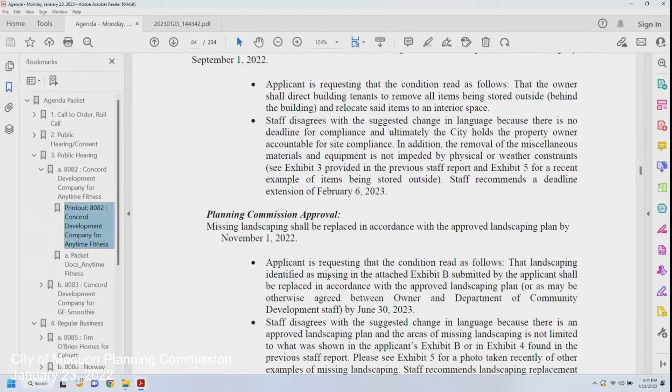I think this is page 93. Thank you, correct. We'll be here all day if I keep going on this. Yeah. Did I just lose it?

There is another fence for trash screening that looks like it just needs a fresh coat of paint. Would you care to comment on the condition of the other fence in question?

Commissioner Stoker: I would ask staff, what's your opinion about going out and inspecting it once the work has been completed? Is that something you would normally do, or is that appropriate?

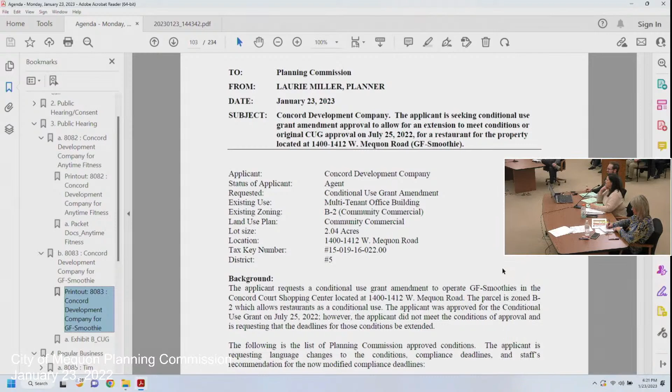I'll make a motion to approve with the same conditions on the fence that we had in the last approval. And I will second again. Motion and a second, any further comments or questions? Hearing and seeing none, all those in favor please say aye. Aye. That item's approved as well. Any opposed? I don't think so.

All right, on to regular business. First up, the first item has been canceled and pulled off the agenda, which brings us to Tim O'Brien Homes.

The applicant is seeking a wetland setback waiver and specimen tree removal to allow for the removal of specimen trees for the property located at 12333 North Lake Shore Drive.

It's a matter of process, did we table this last time or no? We did, yep, in November.

Usually there's a note on there, but I guess first we'll need a motion to remove it from the table. So moved. Second. Motion and a second. All those in favor of removing it from the table please say aye. Aye. Now we can talk about it.

Why don't we start off with a quick staff update, or is there anyone from the public who wishes to speak? We'll start with that before we jump into a staff report. We did get at least one email on this, which I think people have read.

I'll be a bit brief on this one. The staff report is pretty similar to when they were here in November 22nd for the original application. So this is a request for 2 specimen tree removals at 12333 North Lakeshore Drive.

As Mayor mentioned, it was tabled in November 22nd, and it's just for a residential home build. So the key changes from the previous application, 2 main parts. If you guys recall, there's 2 wetland strips on this property. One's a little bit west of where they're proposing the house, and one's a bit east.

There's 2 different wetland setbacks on each of those. The west one is a 50-foot setback or protective area. The east one is a 10-foot setback. In the previous application, the applicant had the house proposed about 14 feet off that west wetland, which was ultimately not approved as a waiver of that reduction. So they've now moved it to 30 feet off that west wetland, still requesting the waiver for the reduction there. And then they meet that east wetland setback.

Staff also recommended lowering the elevation of the house by about 3 feet at that November meeting from that application. The revised plan that they have tonight has the house 1 foot higher than the previous application.

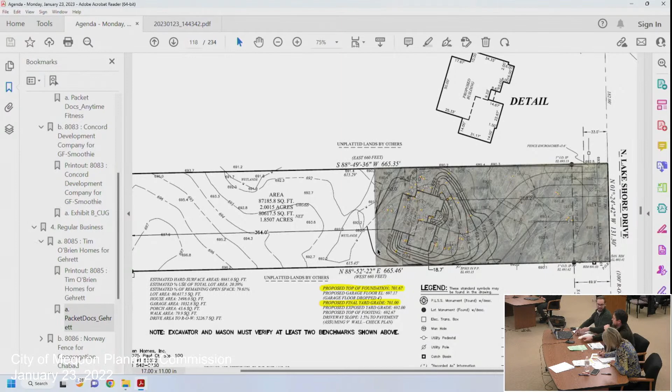Got a notification when I watched it. We have no sound online. I don't know if the audio-visual technician can hear that. Apparently, we have no sound online when people are watching at home. I'm not sure what to do about that here, but we'll keep rolling and we'll try and figure it out as we go.

Any questions from the commission on the revised plans before us? I know we talked about this at great length a couple months ago. Commissioner Bach, just discussion?

Yeah, so I remember we spent a considerable amount of time talking about this area, and I'm still a little bit confused and just want to make sure I understand everything. I had a chance to drive out there and walk around and look at that property this afternoon. It's a challenging site. The home that I was at this afternoon, it's clear that, like many properties around here, there's a whole bunch of ash trees that are gone.

On this particular property we're talking about, there's going to be a considerable amount of landscaping needed. There's a lot of buckthorn, a lot of dead ash that are going to have to be removed, plus the specimen trees that we're talking about. So that's going to be a whole new area. It's going to look completely different.

They did have a diagram of what that would look like. They didn't provide a grading plan because, with the elevation they currently are showing, this would be very difficult for them to not impact these wetlands since it's only 10 feet from the edge of the house. So just grading down from the elevation would be a challenge, or they would need retaining walls or something of that nature.

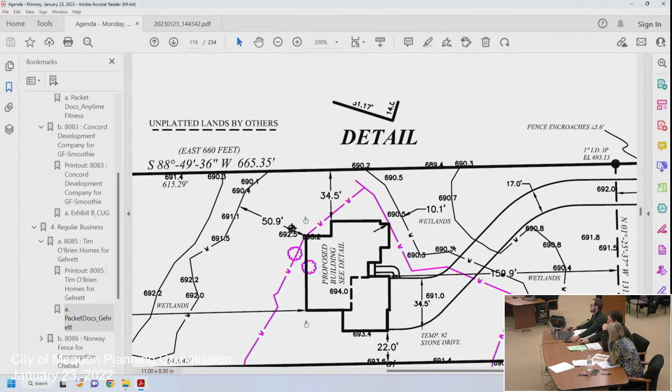Is there a middle ground, not 50, but 40? There's got to be some movement here. The 30-foot setback shown on this other figure is what they were proposing, and they got the grading to work out that way. Most of the reasoning for the 50-foot setback recommendation would be to save those trees that Mike was referencing.

Can I respond? Yeah, just on the setback on east wetlands, the concern I've got from the home builder is that we'd be very worried about disrupting the eastern wetlands in digging the basement if we were to be that close, just like the construction process.

I think if I recall, the more pristine of the 2 wetlands is actually the one to the west. Yes, the wetlands in front are of lower quality, hence the smaller setback. I think the bigger issue in front is making sure the water flow path from south to north is unimpeded and unaltered. So we'd rather encroach further on the ones in front than the ones in back, so long as the water flow isn't impacted. The ones in back are more beneficial from the plant species and the amount of water pickup into the ground there—there's more wetness on the east part of the property than the west.

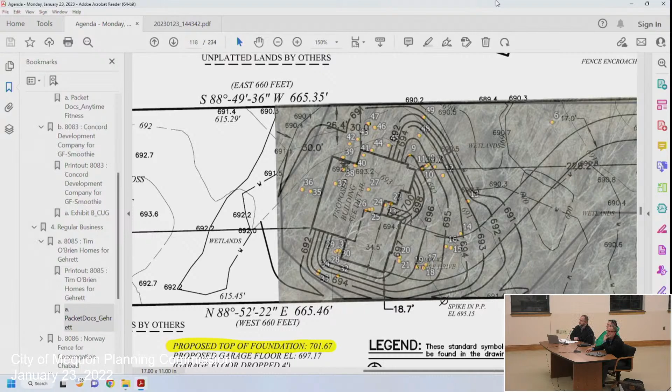The other thing I'll point out is that the proposed building location, even though it's slightly elevated, is elevated versus the surrounding area.

But just a point of clarification, the wetness in the front doesn't mean it's a better wetland. Correct, it's just more wet because the water flows there. I think the ones to the west are actually letting more water get into the ground, which is what we want wetlands to do. But that's also why we don't want to move closer east, because the further we go east, the more wetness there is.

Well, there's more water on the surface. Not wet, there's more surface water there that flows freely. Yep.

I don't know how accurate there's a graph or chart, provided by someone who lives nearby, of the water flow patterns. Do we at all know if that's accurate? Because it seems like there's quite a bit of room to where the water's flowing, so moving this farther to the east would actually be a net benefit. You'd have more setback for the wetlands in the west, and we just don't want to disturb the water flow on the east.

But the wetlands in the front are low grade, the DNR would probably let us fill those, but you just can't impede the stream. You're talking about page 122, and my understanding from walking the property several times, I don't disagree with the general flow of what they've proposed there. To me, that seems accurate. But again, it's east of the proposed home location.

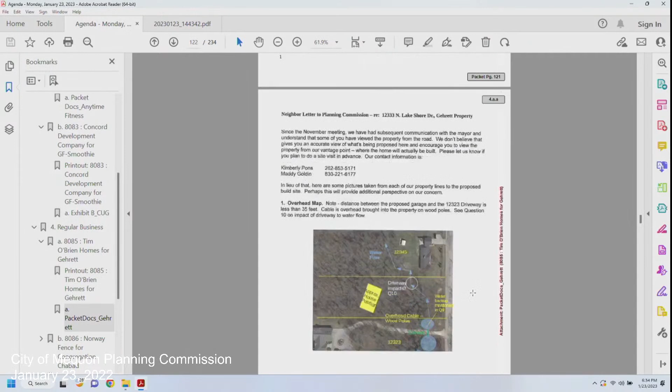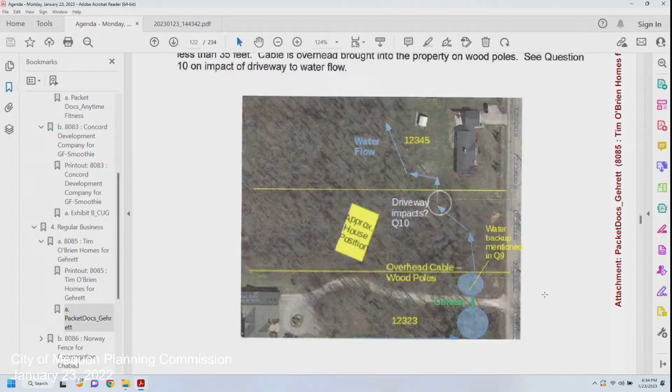I think what we're talking about is trying to push the home farther to the east to stay away from the wetlands in the rear. In November the discussion was, are there ways to get the DNR to omit a wetland, correct? We're not even talking about filling it, we're just talking about getting closer to it.

So in staff's opinion, would we rather get right up to the one in front or have more buffer in the back to the west? If they're meeting that 10-foot setback from that east wetland in both the 30 and 50-foot conditions from the west one, either way is not going to impact that east wetland.

Would we be willing to make a change to the home, the way it sits on the lot, to achieve that? Or a lot of it has to do with the elevation as well. Right, component of elevation. I think that was the concern, the slope off the front of the house would be very steep if they were 10 feet from that east wetland.

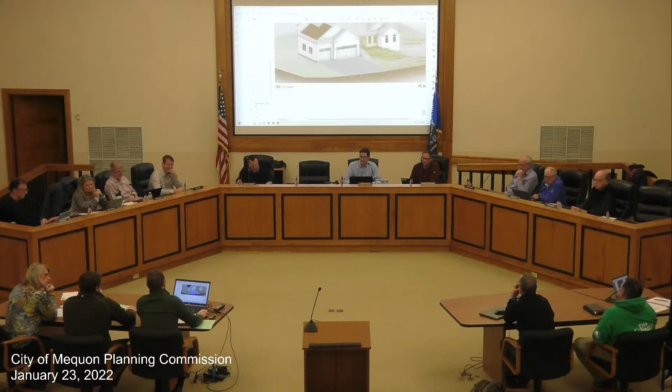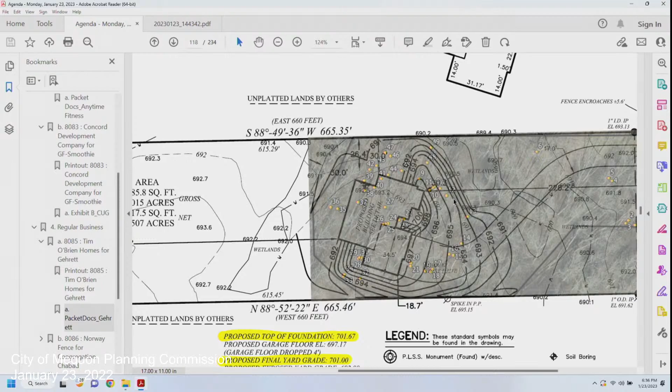But since the one in front is not as nice, would you go to a zero setback, as long as the water flow path wasn't impeded? I don't think they could. Correct me if I'm wrong, but I don't think a 0-foot setback would be constructable without disturbance. So a 0-foot setback on the east wetlands, for what purpose? I'm just asking what's possible. Even reducing it less than 10 would probably be pretty tight for construction, I think.

Commissioner Stoker: I was very vocal about this in the last meeting, and while I actually appreciate this grading plan because I see it working, obviously we have a tree issue with this. I can sit here and say with pretty much confidence, I don't see this commission accepting the amount of trees that are going to be affected by this placement. I thought about this and read every word of this a couple times to get a grasp on it. I do understand this, but it's complicated.

I think this is a time where we really have to look at staff's recommendations and follow them. There's a lot of things here. I was a proponent of changing the way you were designing the house to help make concessions for some of these things. Even if the trees weren't an issue here, I would approve this based on the grading plan, but I would empathize with the neighbors because in my own opinion, it's not going to feel right. That said, I would still approve it because that's really all you can do on this lot. You are definitely hamstrung here, you don't have a lot of opportunity, and I empathize with that.

And I'm actually going to be finding myself in a situation very similar to this in the very near future. So I think because of the complexity of the issue, and maybe not everyone on this commission is understanding it, I think we as a commission really need to rely heavily on staff's recommendations, because even me as a builder, I'm relying on the city engineers that they are comfortable with the way this lot is going to grade. They have much more expertise on wetlands than I do.

So we have to go into the ground, or we have to move the house farther to the east. In order to accomplish that, what do we want more, the wetland setback to the east or the trees to the west? I think it's fair to note that staff's recommendation all along was that the elevation was high. So if you push to the east, the reason for the drop in elevation was to make it more feasible to get closer to that wetland in the front, which I get is counterintuitive, but it would preserve the trees and drop it down so that you could feasibly grade between that wetland and the front. So that's been staff's recommendation all along, and that's what we're kind of being ignored on.

It feels like we'll never get 100% of what we want. But I think the reality is I want to find a way to make it work for you.

I really do, and that's why I almost want to take it off the shoulders of the commission and say we have to follow staff's recommendations on this. Then if there's a redesign or a change, if there's still concerns, come back, and if we have to approve 3 specimen tree removal or something, fine. But this is not an easy issue, and if a decision we make tonight could say that this lot is not buildable, I'm very uncomfortable doing that.

That's why I want to keep deferring to staff's recommendations. I don't have the answer, guys. I don't. You asked the question, what kind of house could be built?

I turn that to the builder. No, we'd have to push the footings down to get 10 feet from that east wetland, yeah.

I guess back to Commissioner Schaefer's statement, just because you can do something doesn't mean you should. Lowering the footings is really the move that gets made if that home's going to slide to within 10 feet of the east wetlands, because you're just not going to be able to slope the ground from that first floor elevation down to the east wetlands.

And what's the impact of doing that to the overall project? Well, it goes against the engineer's recommendation of building the footings above the water table. Again, to Commissioner Stoker's point, gravity's an awesome thing in that regard, and you're sort of fighting it, using artificial technology to try to keep your lower level dry, which yields angry phone calls to all kinds of people.

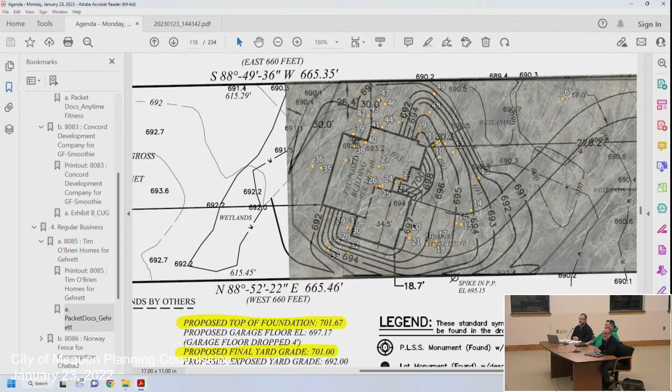Yes. And as a builder, I'm not telling you that's what I think we should do, but this may be a situation where you can't have a full basement with living space. You may need to be in a crawl space, or this might need to be slab on grade. I'm coming to, I guess, without cutting to the chase, you may be trying to design a house that will not work on this lot. And I think that's where we're at.

So I reached out to a realtor from Shorewest to research homes built on slabs. In the last 10 years, there were 2 homes sold in Mequon on slabs. One was built in the 50s, one was built in the 70s. Neither of them are anywhere close to the type of home we've designed here. So building this home on a slab really presents all kinds of additional issues.

So I'm kind of left with, I can't come up with something that the staff is okay with, that the commission's okay with, that the home builder and the engineer would advise, and I'm left with a piece of land that I own that I may have to sell to someone else who will be here in 6 to 12 months requesting the exact same thing that I am. Because what could they build that would be approvable by everyone here tonight? I don't have any easy answers to that.

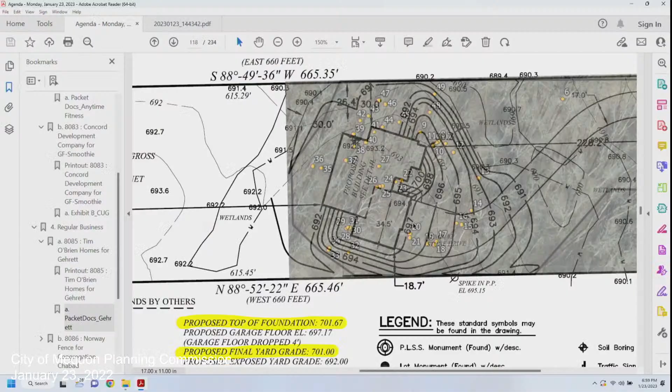Commissioner Barnes: And again, not disagreeing with what's being brought up here. Just a fresh idea, and we don't have to get into the detail of it, but would there be a feasibility of a common driveway that would allow, call it a relocation of the house, the proposed house framework and the driveway and its relative position to the wetlands with the gradient change?

I just sent off, and I'm not sure that the driveway is the particular concern. We have approval from the DNR to cross the wetlands already with the driveway. I understand, but in terms of placement is really what I'm looking at. I think it's the framework of the house.

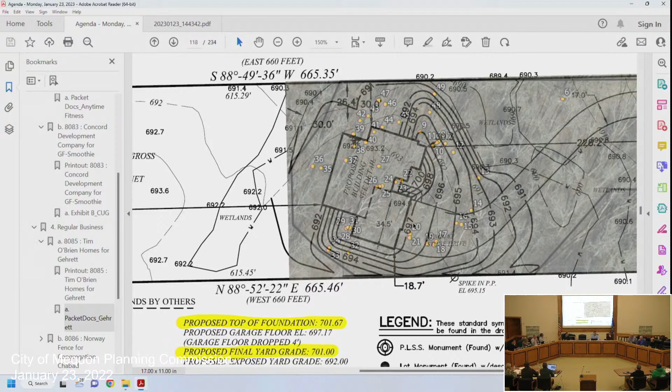It's pretty clear, trying to get the exact page here. It's pretty clear on page 119 of the packet. There's a certain setback from the front and rear wetlands and the grade, and that's where you have to put the house, somewhere in that area, or very close thereabouts. The driveway is not really the issue. You just have to cross a wetland, which you can do with a culvert and still maintain the water flow.

But it wouldn't affect the position of the house in terms of an access coming from the south. Not that many other places to go. So, okay, enough said.

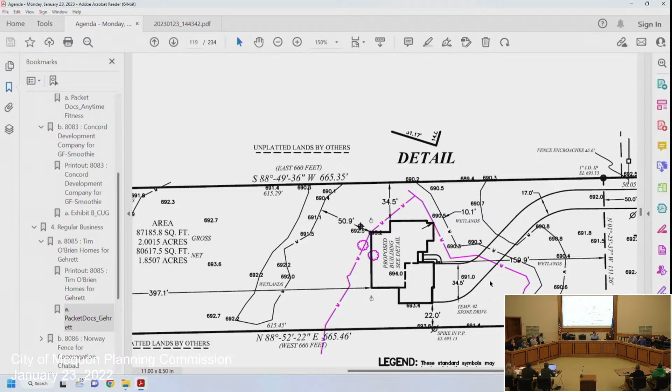One last thing. So we're basically to a point where we're saying we're willing to say this land isn't buildable because of these 11 trees that don't meet the 30-foot setback we've proposed, where 31 trees would have to be removed. If we move it within the setback to 10 feet off the east wetlands, that saves 11 trees, but it would push the house down into the water table. So we're saying based on those 11 trees, this property isn't buildable.

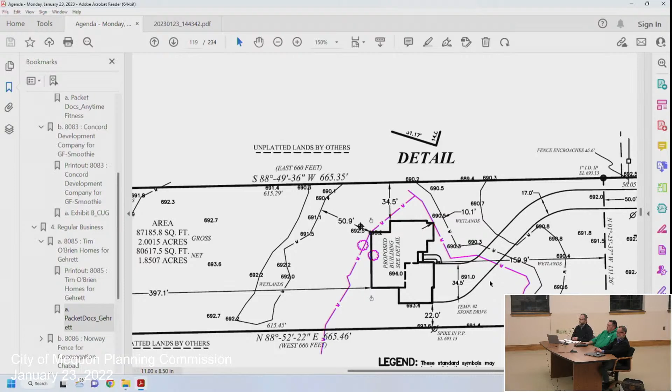And the home, because that's the decision, and the overall home height. We've got to take one issue at a time, just as the mayor proposed. I don't think we can. I think it's a lot, and I think it's aggregate. I think it's everything as a whole for me.

It's not like, okay, let's talk about the trees and debate this, let's talk about the home height. The trees are a consideration for me, but the home height is a no-go for me.

I think we've had some pretty hefty discussion. We've tried to legislate to our best ability on the fly as a commission here. I haven't heard one positive thing from the commissioners. I think you've heard the concern. I think Commissioner Stoker eloquently and pretty directly put it that maybe you can't build this house on there.

You probably would have to look at some different basement configuration. You've got high groundwater on there, you're in between two wetlands. This lot has concerns. We're not saying it's unbuildable, but as the plan is before us today, I don't know that it's approvable.

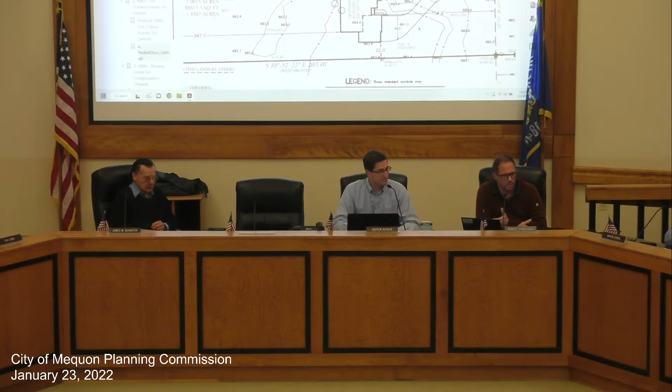Based on that, I would like to make a motion to deny. I'm looking for a second and then to call the vote. I would second that. I have a motion and a second. Are there any further comments or questions?

Seeing none, I have trouble with this. I'll just say this: I have trouble with this one because it's a challenging site. We're trying to protect the wetlands. I understand not wanting to put the basement well into the ground and the challenges that would present. And I understand the argument for the grove of trees, but the tree preservation ordinance has standards for species and

caliper that clearly give us the right to approve or deny something. It's a little squishier when you get into trees that don't meet the size. I know the ordinance is a little squishy, but it's placing another undue challenge on this property.

If we're going to keep this zoned R1B, we should be open to something being built there. Maybe this isn't exactly it yet, but it's a challenging lot. It's been empty for a long time because it's a challenge. I understand everyone's reservations. I think we should find reasons to say yes where we can, and maybe this isn't the proposal, but...

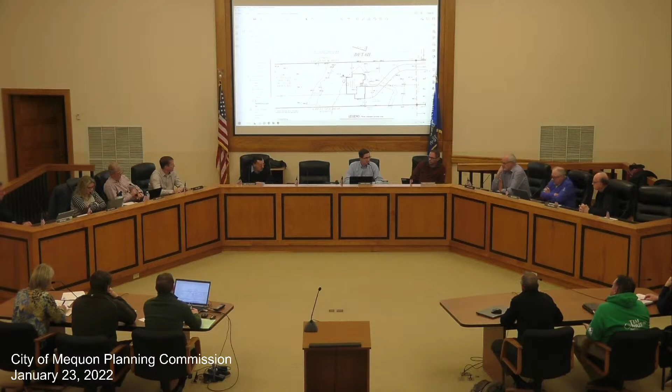Commissioner Becky Schaefer: Aye. Commissioner Stoker: Nay. Commissioner Lemke: Aye. Commissioner Jim Schaefer: Aye. Commissioner Gentes: No. Commissioner Chorin: Aye. Alderman Strelchuk: Aye. Mayor Nurbin: No. The vote does pass, 5-3.

Oh, we're past that item. Sorry. I think we should be open to something working here. This just wasn't quite it.

Next item, Norway fence for Congregation Chabad. Applicant is seeking a site plan amendment approval to allow for the fence along Mequon Road for the property located at 2233 West Mequon Road. You've got this one, Jack? Yeah. All right, thank you.

Okay, so this is a request from the Center for Jewish Life to put a fencing along the front of the property. This request is coming out of a security study that was done at the property. They're looking to put up a 6-foot metal fence along Mequon Road, approximately 300 feet in length.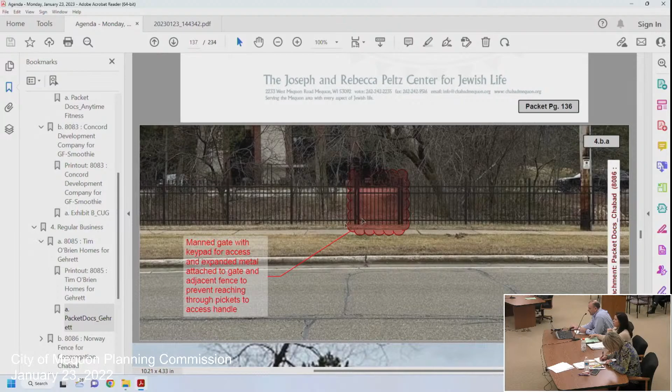I have some pictures here. There was a rendering that was done, and I'll show you that to give you a sense. Now, it's not 100% to scale. You can see from the drawing that the fence will not be that close to the road, and it will not be in front of our stop sign and our street sign, but they just wanted to put together a rendering to give you an idea what it was going to look like.

Originally, this request was going to cover the entire frontage, including the road, but this road actually serves a number of residences in the back, so we told them we could not cut off access to those properties. Instead, what they were suggesting and doing is building these columns and adding security cameras and lighting on these two columns. The fence would continue to the east, with one section where they would have a gate. There's a little walking path used by the residences who walk to the site, so there's a gate they would put in this location with a bit of a code to get in. Other than that, staff is supportive of the fence.

There's a couple recommendations we made. One is that they add landscaping to the front. The fence will be about 7 feet off the property line, so there's adequate space to put intermittent landscaping.

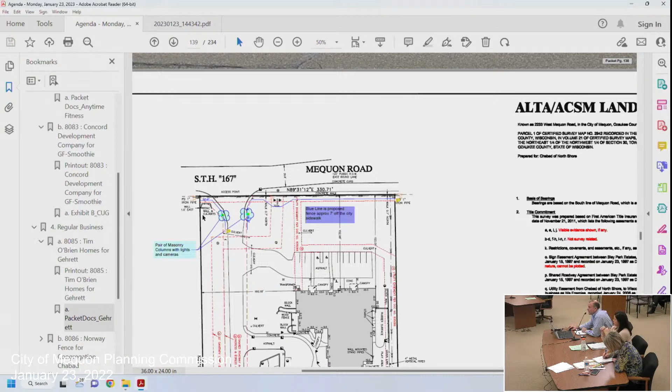You can kind of see it, I'll zoom in a little bit for you. There's a monument sign located right here, and the fence currently jogs around that. We're just asking that the fence come straight this way, so there isn't that jog. I think that'll help with the vision corner, as well as keeping their sign unobstructed from people driving down Mequon Road.

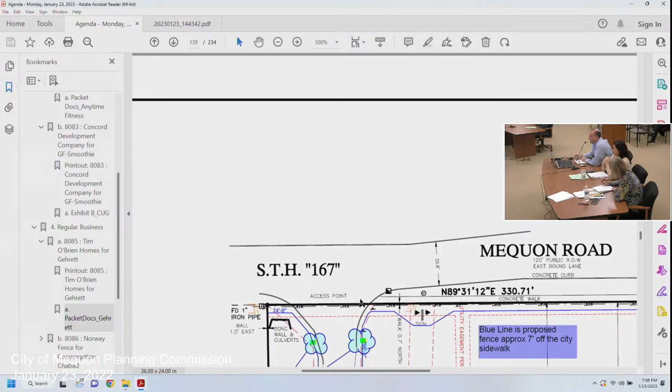In addition, there's a couple of easements on the property. One is our utility easement, which Cole addressed in the report, and there's a We Energies easement as well that runs along the length of the property, for the electrical poles. So we just need to get some kind of clarification or approval from We Energies that they're allowed to put that fence within that easement area.

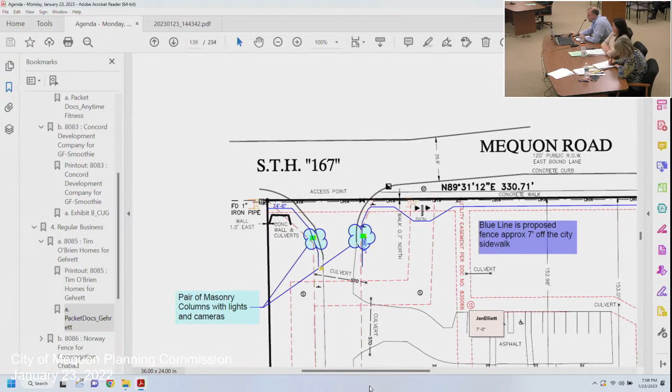And we are asking for the sewer easement to be modified to allow for that fence, with a condition that if they ever need to get in there to work on the sewer, we don't have to repair the fence—that'll be on the owner's dime. So with that, we do recommend approval of the fence according to the conditions in the report.

Thank you. Any questions from the commission? I think it looks nice. So thank you. Commissioner Barnes?

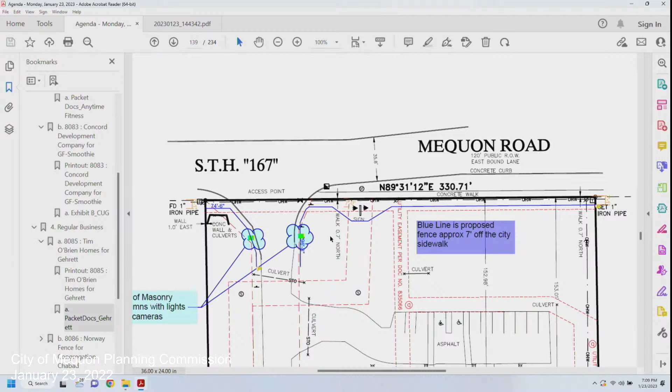Yeah, just a question is, the part of the proposed fence shown on what would be, I guess, the west side of the driveway—this small section here. Would that be running from the decorative entry monument out to the corner of the parcel? It'll go to the corner of the property line and then kind of come back into the pillar, so it'll dead end into the property line.

Yeah. Again, so my only concern that I bring up is the vision triangle, just like what you mentioned for the other direction. It's really more crucial in that direction for seeing oncoming traffic, and it's not that you're going to block the entire view, but it's constraining it a little bit. So I'm just wondering about the configuration on that side of the driveway.

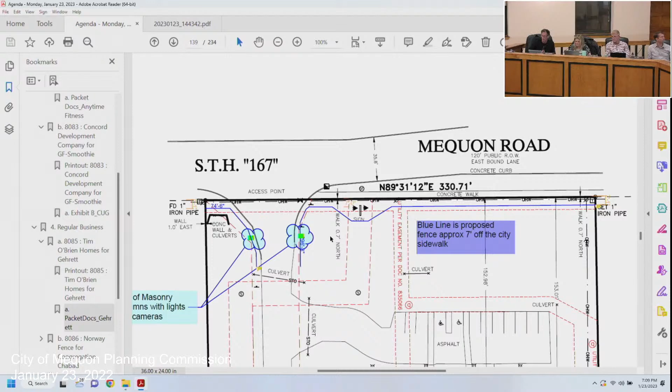Yeah, we'll take a look at that. I mean, it is going to be 7 feet off, so the picture is a little bit misleading. So it's a little further back, and the fence is not opaque—it's got openings in it. I was trying to look at that out of sight, just with respect to the stop bar and the sidewalk, etc. But it was just with what is a high volume street, and the use—it's just a risk.

Yeah, when they submit for the actual building permit for the fence, we'll vet that out thoroughly at that point to make sure there are no issues there. That's a good comment, though, because it will be farther out than the fence on the east side with that one staff recommendation.

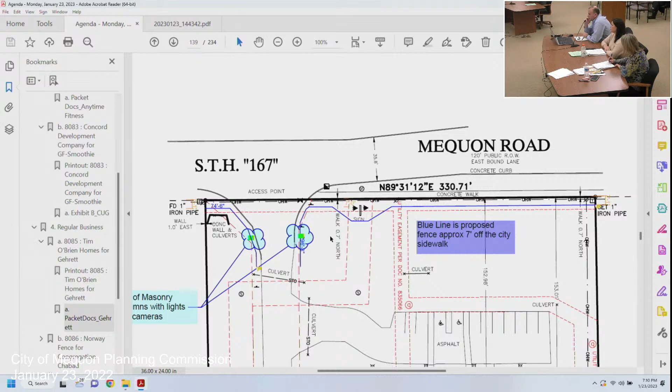But if that's going to be handled in the building permit process. Yeah, we can handle that. I think the only thing we want to watch on the other side is how much vegetation - there's a gully in there, so there's some challenge, some grade issues. It's sacrificing driver visibility of oncoming traffic, so we're going to try to balance between the two. I think we can handle it. Thank you. Any other comments or questions from the commission?

Commissioner Schaefer: I have two things. The pictures that are submitted - is that existing fence already on this site? Page 137, the one with the manned gate? Oh no, that's just a rendering. It looks pretty realistic, really good art.

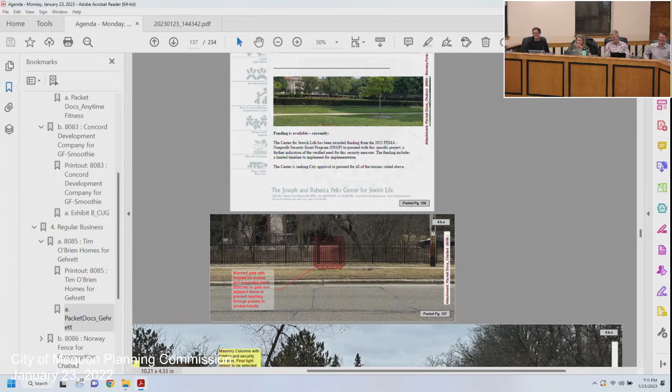And then just a comment - I'm sorry that you feel you have to do this, for the reasons that you feel you have to do this.

Commissioner Stoker: I would just ask, does the applicant agree with the recommendations of staff? Seeing that, I would motion for approval per staff's recommendations. Second. Motion and seconds. All those in favor, please say aye. Aye. Any opposed? Congratulations, thank you very much, looks good.

Next up, Parish Survey and Engineering LLC for Ozaukee Country Club. The applicant is seeking a building plan and site plan amendment and specimen tree removal request approval to allow for a proposed 11,400 square foot building with parking lot, driveway, and rain garden for the property located at 10823 to 11185 North River Road.

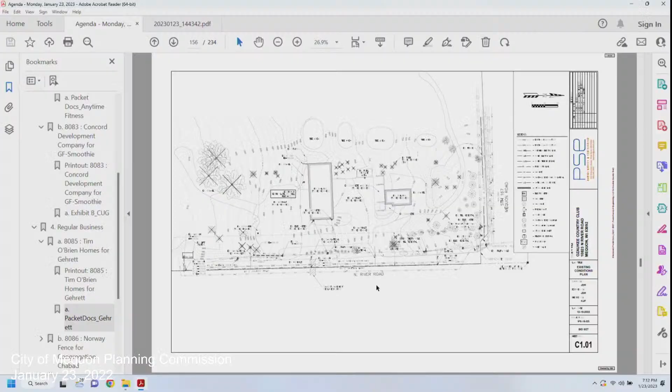Is this you again, Jack? No, Lori's got this one. Yes. You may recall that when they were here last time, part of the approval was to make sure that no trees were going to be removed as part of the site plan. Unfortunately, that couldn't be achieved, so that's what brought us back here today.

No trees in the location of the northern end of the parking lot, between the parking lot and River Road. Correct. So just to take this step by step - we ended up having to do a tree survey, which triggered the tree specimen removal request you're seeing. The Forestry Division recommends approval of the request to remove the 2 specimen trees noted in the report due to limited options for adjustment of the building without impacting additional trees.

So that's pretty straightforward. The new proposal includes minor changes to the building - basically meeting the requests we had last time, which is adding 2 windows onto the east elevation and changing the roof color to match the other existing roofs on the property. Several changes were made to the site plan to reduce impacted trees on the property and the amount of grading required to accommodate the parking lot and structure. The location of the proposed building hasn't changed at all.

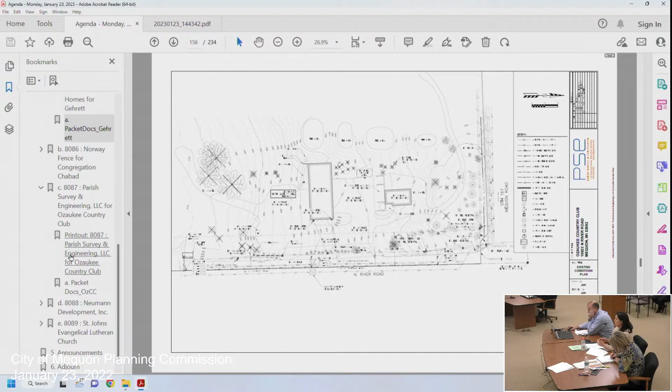The building does not comply with setback requirements from River Road, and that was an issue last time. There's a 50-foot ultimate right-of-way from River Road and a 60-foot setback from the ultimate right-of-way. The building is situated at 83 feet instead of the 110 feet required. Staff, however, supports this because the existing structures right now are much, much closer to the road, so this is still making it less non-conforming than before.

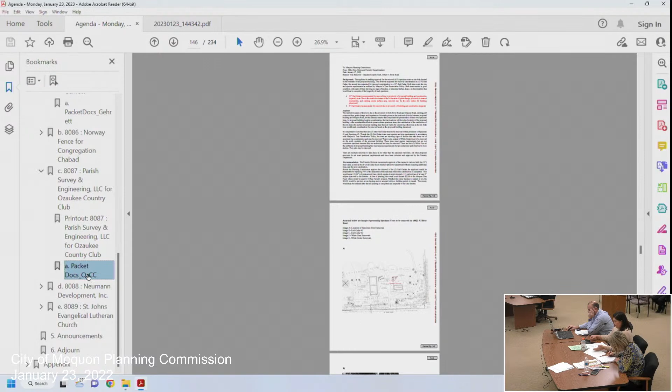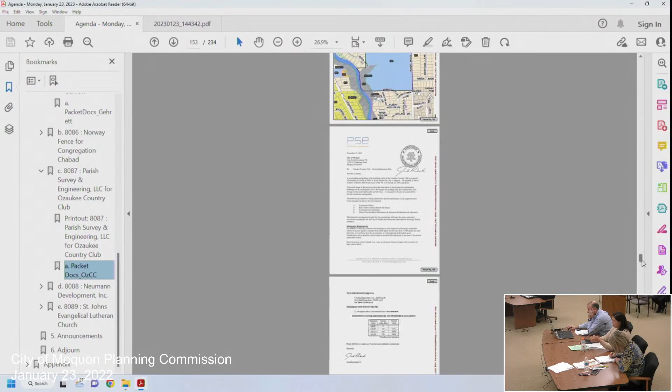Moving on to the parking lot. Mayor, do you have a question? Nope, sorry, get to the parking lot. I think the parking lot is where we sort of left off last time. Yeah, so the existing parking lot and drive aisle do not meet the IPS zoning district standards.

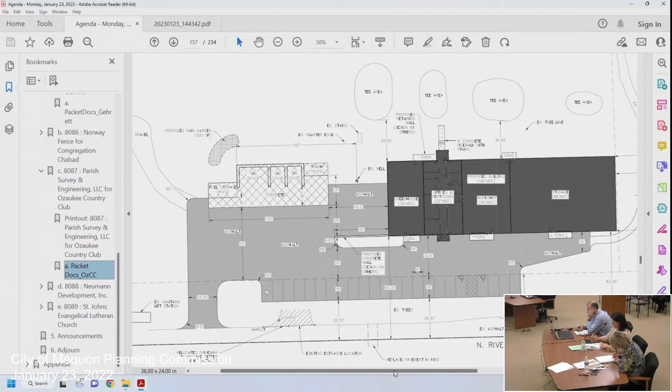The standard requires 20 feet off of the property line for the drive aisle and the parking lot. On top of that, this parking lot not only goes to the property line, it goes into the ultimate right-of-way by 18 feet. The applicant is requesting a conditional use grant waiver to forego that 20-foot setback and also a right-of-way waiver for the 18-foot encroachment into the ultimate right-of-way. So two things going on here. The applicant stated that they must place the parking in this location because the building will provide an adequate buffer between the cars and golf balls shot off the nearby tee boxes located on the west side of the building. You can kind of see that on the screen there on the top portion.

So the city has a 20-foot offset requirement for parking and drive aisles to provide room for landscaping and buffering between the buildings, roads, and adjacent properties. The 50-foot ultimate right-of-way was instituted to preserve space for future expansions of roadway and bike and pedestrian accommodations.

While it's not anticipated that River Road would be widened to accommodate additional driving lanes, there is a potential that turning movements for the Mequon Road signalized intersection would require expansion in the future. In addition, there may be a future change in the city's philosophy on adding sidewalks or bike lanes on River Road. Essentially, if we remove this option, we're not getting it back.

Staff recommends denial of the conditional use waiver and right-of-way waiver. Staff believes there's sufficient open space to construct a parking lot to the south of the proposed building, which could be protected from golf balls with a combination of screening, landscaping, and fencing.

Should commissioners approve the parking lot to exceed the 20-foot setback and encroachment into the ultimate right-of-way, staff recommends a right-of-way waiver for the parking stalls location be executed and recorded with the following conditions listed in your staff report. This includes making sure that the property owner removes that portion of the parking lot and installs landscaping in accordance to the current code.

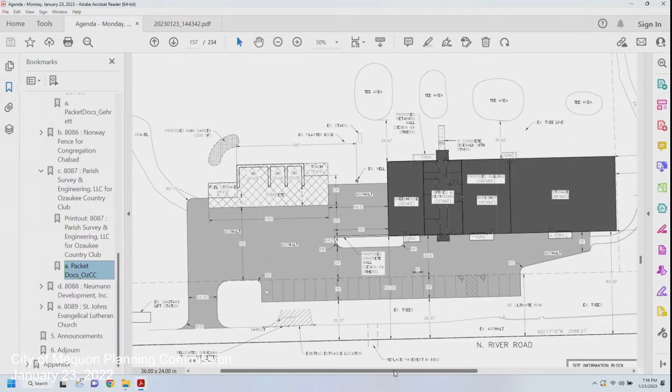All right, thank you. So I think where we left off last time is there was a little disagreement over the exact number of parking stalls, and there was a desire to add more, assuming that more trees were not removed on the northern end. What does this plan reflect?

I think it's 23 stalls, and how many? So there's some non-specimen trees that are likely to be impacted on the northern end. Sure, we have a number on that. So that was where we left off last time.

We basically approved all of this, even with the setbacks for where the parking lot is now. And I'll disagree after walking the site.

If we park cars to the south, they're not safe from golf balls, especially if I'm golfing. And they're also likely to be underwater, I think, some number of days during the year because everything drains down to the south, and it's very, very low and wet at certain times. So it's not a great spot for a parking lot.

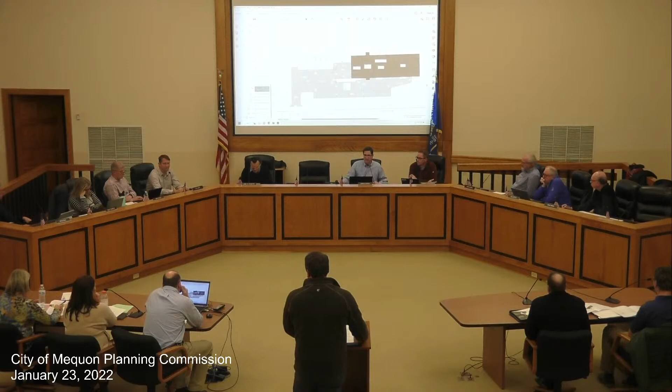So I think we're left with the parking stalls and what's going on the north end, and we're basically back to where we were 2 months ago, 3 months ago, something like that. Jack, can you bring up the tree site plan? We approved it, now it's different, so it came back.

So to kind of reference, Mr. Mayor, what you're talking about, there's only 2 trees that are being proposed for removal on that north end, the far north end. Neither one of them is because of the parking concern.

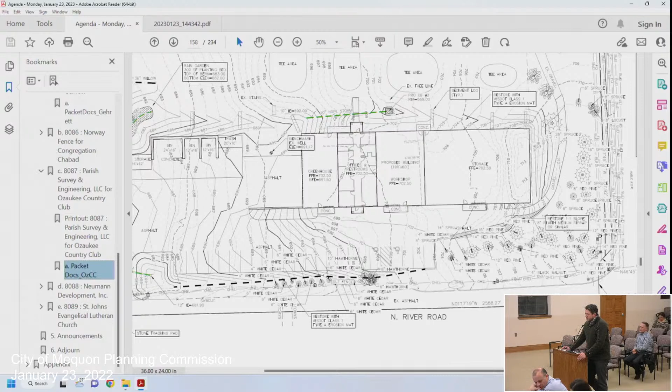There's a small grouping of trees that's being removed just to the north of the arborvitae line, the hash line at the bottom there. There was a few dead ash in there that actually we approved for removal. And then there was a downy hawthorn, but it was about 3/4 of the way dead.

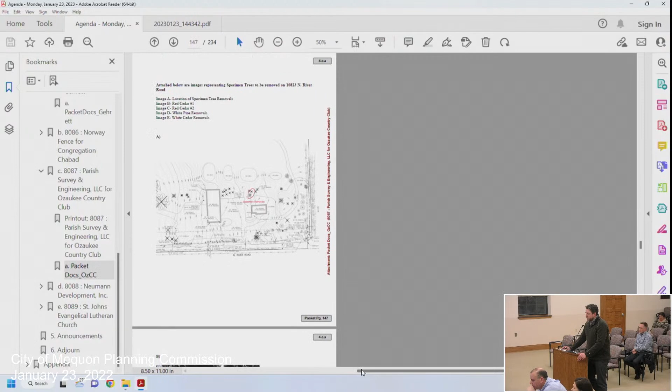And so the 2 trees, the evergreens that are being removed, was one white spruce that was in real poor condition, and then actually there's 2 white spruce. So one was all but dead, and the other one had Cytospora, a fungal disease that's basically killing it from the bottom up. And so those are the 2 that we approved for removal.

Neither one of them is specimen. The 2 specimens are actually, if you look at the map behind you, west of the proposed building. They're circled in red on that sheet. Both of them are western red cedar, one 8-inch, one 13-inch.

They're in good shape, but both of them have limbed up to a point that, standing by themselves, they're not in desirable shape, I guess. The other 3 that are on site, I think there's 5 total, are in such poor condition because they've been shaded out over the years that we wouldn't even consider them specimens, just because their condition rating is very poor.

Okay, so the parking lot crept a little farther to the north. There's a couple trees that are going to get taken out, but they were in bad shape or dead. Right. Yep. Okay.

So basically, this just reflects the final version of what we thought we approved last month. We had some discussion about what was the actual number of parking stalls, and it sent it off in this direction. Now we've got a final determination.

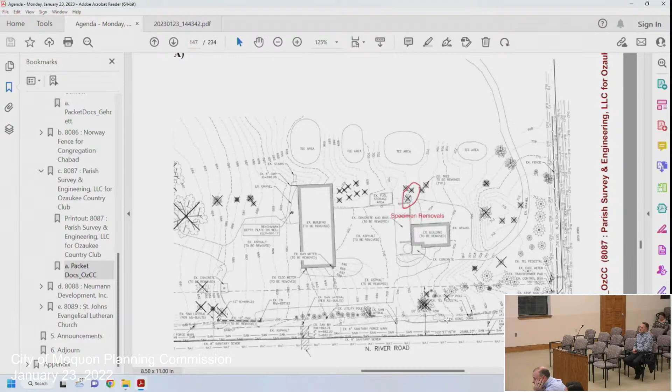We approved it. There was just a question over the total number, and there was disagreement on the final number. It wasn't even reflected properly in the plans due to a snafu on the other end. So there was some direction to approve it with whatever number they wanted, if it was 24, 25. But we gave them guidance to not cut into the line of trees on that northeast side of the property. I guess this does cut into it a little bit, but it's going to remove 2 trees, one's dead and the other one's dying. I think that was my recollection. I think I made the approval that we approved it if they didn't have to cut down any trees. I assume they're back because there's 2 trees, but finding out the condition they're in, I'm fine with that.

Is there a question or a comment, Commissioner Stoker? Or nope. Commissioner Lemke said everything you wanted to say. Is there a motion? Move approval.

Move approval with allowing the parking lot to be shown as presented in the packet, not necessarily with the staff recommendations and denial surrounding that. Correct. Second. Motion and a second. Any further comments or questions?

Does the motion include the alternative planning commission conditions? The alternative what? The commission recommendations from staff. There was a couple with regard to the ultimate right of way. I just want to make sure if that's part of the approval over the ultimate right of way. Jack, can you bring that up? Yeah, let's bring it up and specifically which. Let's vet that, make sure that we got that buttoned down. Yeah, we don't want it to come back for any reason. Hopefully.

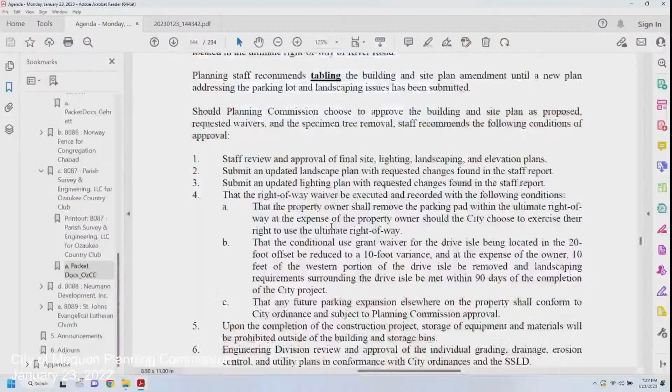Is that item 4, the right-of-way waiver? Should planning commission choose to approve the building and site plan as proposed, requested waivers and the specimen tree removal, staff recommends the following. So there's the following 14 conditions.

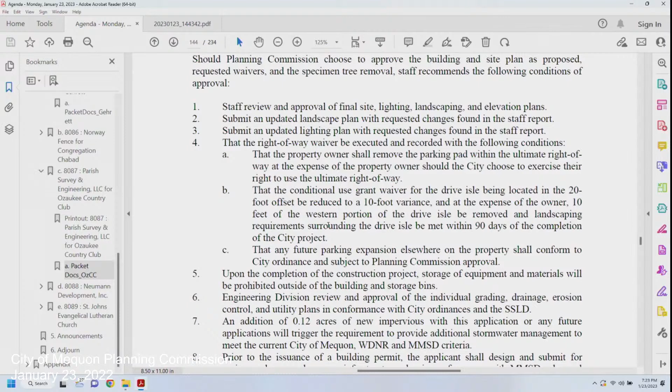I think we're approving it with all those in play. I just want to clarify that. Correct. Is there any items in those 14 that the applicant takes issue with? I thought they were all common or reasonable. Some of them are required for the specimen tree removal. We don't have a problem with them.

Does that include the connection to public water as well for the bathrooms in the building? Yeah. Okay, so if we're amenable to all those, we're recommending they be approved with staff's alternate set of recommendations, assuming we chose to ignore their prior set of recommendations. The 14 items on pages 144 and 145.

Commissioner Schaefer: For Alderman Strelchek, when you say move approval, does that mean that you're following staff's recommendation to deny the conditional use grant waiver and the right-of-way waiver? So there's 5 different items staff listed, and then for that last item, the tabling of the building and site plan, that's where the conditions come in. Did I read that correctly? No, that's not what the motion encompasses. The motion embodies the paragraph that follows in the 14 conditions.

So we're just approving the site plan as the building shown, site plan amendment, as shown. Okay.

And I was out at the site, which is why I'm comfortable with it. I was out there and I looked at that further south option for the parking lot. There was some discussion about moving the building west. And those are their tee boxes. I mean, literally it's like saying, oh, you want a parking lot, but ABC Manufacturing Company, we'd like to cut out 30 feet of your business building to do so.

Jack, is this yours? This is me. Thank you. So this is a request, as you said, for concept plan, preliminary plat, development agreement, and fill permit. This was in front of us in February of this year. The reason the concept plan is back is because they changed the number of lots. If you recall, the last plan had 27 lots being presented, because they were not sure and probably were not going to go with a sewer option. They worked it out with engineering, and this will be a sewer development, so they were allowed to increase the number of lots now to 37.

So what I have in front of you is the updated concept plan. This is actually a little bit different than what was in your packet because they did address some of the issues I had in my report, and I'll go through them. In terms of the plan, it complies with our new Ulao Creek Residential Cluster District. It requires at least 30% open space. This plan shows roughly 34% open space. They have to designate certain lots as side loading garages, which are color coded on your screen.

Some of the things we talk about in the report that we asked them to address, you can kind of see it in green. They're showing a dashed line here - this is a new addition from your plan. We were asking for a no-mow path to go around the entire perimeter. They added one here, but it says optional; we'd like to see that as required. They also added a tot lot in this location - one of the things we required was an active play area per the code, so they did add that. We'll need to see a final plan for that as well.

Commissioner Bach: As I said last time, I think in February, I appreciate the detail and thought put into this project. Three years ago, I lived in that neighborhood and was getting hit pretty hard with the original proposed development, and previous Mayor Worth was told there will never be residential development on this tricky corner. To see this, I'm really appreciative of the work put in, and I'm supportive of the project with staff recommendations.

One thing I would keep in mind going forward in this area—Commissioner Becky Schaefer will probably agree—is that it's tricky traffic now between the river on Highland and that new on-and-off ramp; there's a new traffic pattern over there and people are getting used to it. There's a lot of cyclists in the summer using that route, and the speed between the river and Port Washington Road, people are moving pretty quickly. I've seen the police over there, coupled with the fact that you've got dismissal and pickup for Oriole Lane, and they're queuing up on Highland Road. There's probably been a couple near misses I hear when I'm walking my dog. So it's going to be a little tricky on the entrance on Port Road and the exits on Highland Road, and how that all works with the engineering on traffic is something to keep in mind. I'm sure there's been some thought put into it, but it's getting to be a busy area. Those are my comments, thank you.

Commissioner Schaefer: Yeah, I was going to ask about the connection to Oriole Lane. Where is that going to be? They show a little path connection there. Right now it doesn't really go anywhere, but if there are residents who live here that attend the school, or grandparents or something, they could always walk up here, and then it would be up to Oriole Lane to accommodate any kind of connection to the school. We thought, have them put it in now, and if it's necessary the school can look at it further.

It doesn't have to be asphalt either, they could just have a nice mowed area that they can walk through. But that's not Weinberg property, that's MTSD property, that's school property. Weinberg property ends probably around here somewhere in this location.

And then the lights, I think we've talked about them enough. But there are two separate issues: what is existing at Ascension, which I do think is a concern, versus what is going to be done with this. Is there any way to make it... I feel like it needs to be more. Yes, you need them for safety and visibility, and also it's a neighborhood, so anything that's blue is going to be exceptionally jarring, even more so than it is on that corner. Can it be a different shade in the subdivision than it is there?

So we want to make sure we have consistency throughout, and fix this issue now before it gets further carried away. One of the reasons it's so evident is because we went with a more traditional fixture, which is not a full cutoff fixture, so you can see the light source. We thought the lens would help with that, and with the color temperature being as low as it was. We worked with a lighting designer and thought we were comfortable, but we did get some complaints on it.

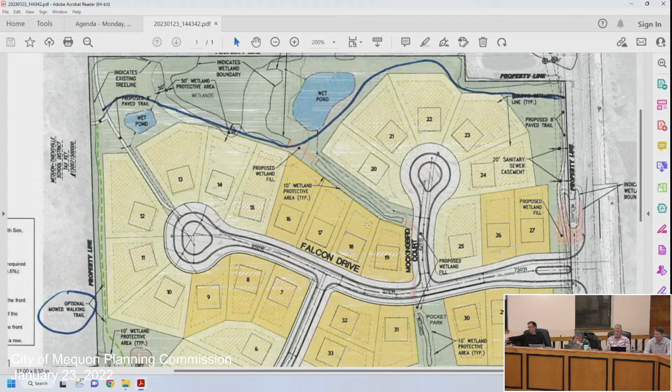Commissioner Strelchek: Continuing on the lighting, I'm looking to have a condition here, either with a motion, or I'd add as a friendly amendment if somebody else makes one. Because what's there currently isn't working, and I don't want to see it repeated. I would say change condition 1 to add something to the effect that modifications reduce the color temperature and glare of the current fixtures on Ascension, something of that nature. Because condition 1 says it shall include the approved light fixture, so once we make changes to that approved fixture, that would carry over.

So we don't know exactly what we want now because we need to fix whatever we've got, but that shouldn't be controversial. I think everybody's on the same page. Whatever we tell him to do, he'll do. It's up to us to get it right.

We'll have to bring a landscape plan back. Yeah, that's the only other thing that'll come back. Street trees and landscaping will have to come back as well.

I just wanted to make a comment. I'm really pleased to see single family residential there. I grew up in that neighborhood, across the street from Commissioner Chorin as a kid, so he knows I hot dogged through the neighborhood on my bicycle. It's a safe and good neighborhood, and to have more residential just north of there is what a lot of the old neighbors had wished for. I'm really, really pleased to see that back in the area again. So thank you, great plan.

I'm glad you're hooking up with sewer and water, and I'm in support of this with the lighting adjustment. I'll make a motion.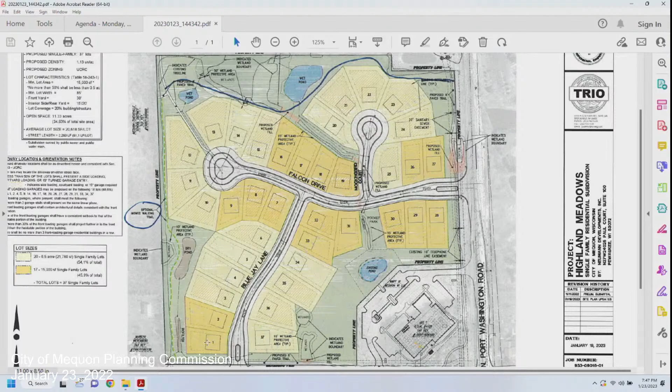Yes, okay, I'll make a motion with that, and condition 1 on the lighting, that we'll work on a greater cutoff and address the color temperature per staff final review and approval. The goal is to create something consistent throughout. So moving approval based on those conditions.

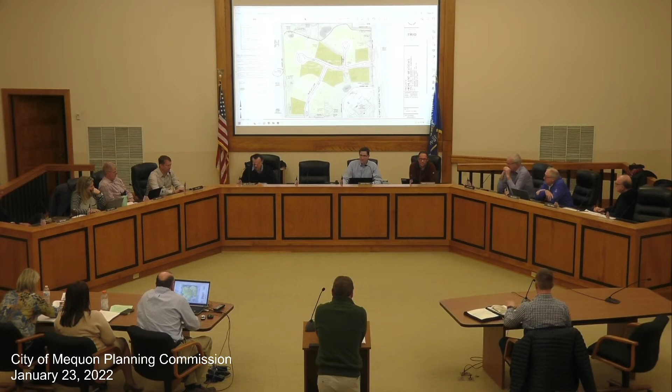Second. Motion and a second. Is the intent of that adequately captured? Yep. Okay, any other further comments or questions? Hearing none, all those in favor please say aye. Aye. Any opposed? The item's approved.

Looking forward to the development. It's gonna really make that part of town look nice. A long time coming. And the neighbors love it already. You got two here.

Next up, we have St. John's Evangelical Lutheran Church. The applicant is seeking certified survey map approval to allow for modified property lines, and a rezoning recommendation approval from R4 zoning to B1 and IPS for the property located at 1600 to 1717 West Mequon Road.

Yeah, that works. Quick staff overview. Lori, you got this one? I've got this one, sir.

Right now, we're proposing to split off the St. John's Church property so that it's one lot, which is 1.55 acres. The intent is to rezone this as B1 to be used for an insurance company. They'd like to retrofit the existing barn and house for that use. We're going to leave the other 4.36 acres with a child care center, which is already on the lot, the church, and a home. The child care center is currently zoned R4, so we're requesting that be rezoned IPS to match the rest of the lot and get rid of that split zoning.

The proposed zoning changes are not completely consistent with the land use plan map designation, which designates adjacent properties as residential and institutional. However, Children's Hospital is right across the street, and we've historically used that as the transition mark between our commercial and residential districts, so it's not far fetched to change that across the street into B1. Both lots meet their proposed zoning district bulk dimensions and permitted use standards.

However, staff has some concerns about the future buyer's proposal to retrofit the house and the barn for commercial use and its ability to meet state code standards. Staff recommends that the B1 zoning change would not take effect until the CSM is recorded, building and site plans have been approved by Planning Commission, and the future buyer, Joe Wolfel's State Farm Insurance, building plans have been approved for commercial use by the state.

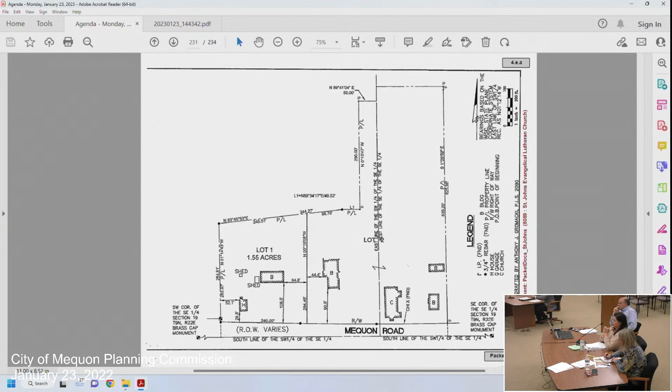Okay, any further comments from the commission? I think the rezoning of the IPS is a total no-brainer. It's just a bit of a mess to have the split zoning on that parcel.

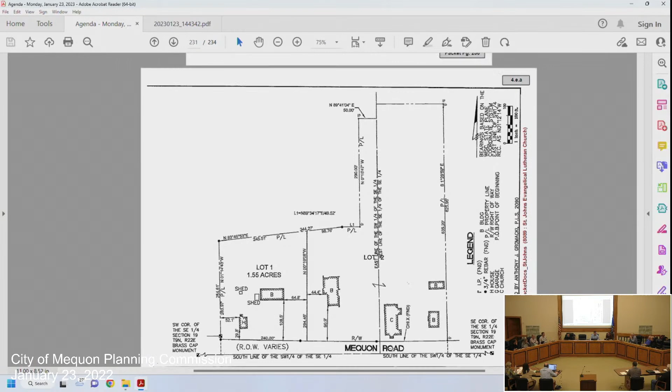I'm curious on people's opinions on the B1 use for the, well, now residential property. It is true that Children's is right across the street. That was maybe laid out in such a manner that the stormwater pond served as a nice buffer from the residential to the west. There's maybe a little more limited space to work with here.

The insurance office isn't a concern. I think if we're going to rezone it, we have to think about what might be there in the B1 district someday, so I don't know if people have thoughts prepared on that. I could see this particular use working.

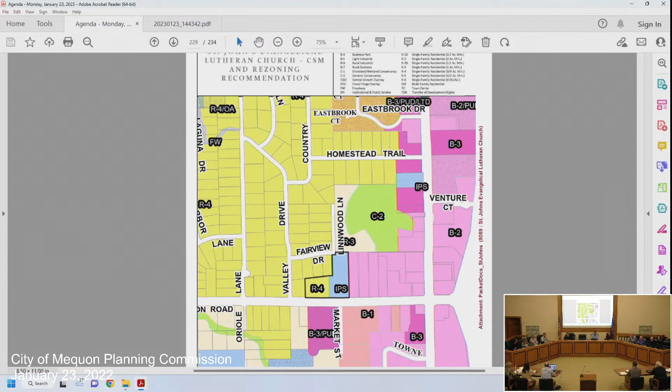Maybe let's bring up the B1 definition from the code and make sure everyone understands it. B1 in the code is actually a neighborhood commercial zoning district, so it's for uses you'd typically find in a neighborhood. We use it a lot in cases like this where there's a buffer between residential and commercial, even though this is on our main commercial corridor. We would never want to see a B2 here, because then you have allowance for fast food and other high intensity uses.

So the B1 has more restrictive uses, but I anticipate this will be a concern at council with the creep going west along Mequon Road, and where do we stop? This is kind of the same situation we had a number of years ago with the Richmond Investments off Mequon Road and 76th Street, where it was the last one again, and it was a residentially zoned lot. They went in and it turned out really nice, but there were concerns from the neighbors, as well as what's going to happen long term for the rest of these properties as we go further.

I think this one makes a little bit more sense, or the same amount of sense as Richmond, because this one kind of lines up, like you said. I have the zoning map up on the screen. It does line up pretty close with the end of the Children's B3 zoning on the other side.

Now, the only concern you'd have, and I'm not sure there's much you could do about it, is if it does get rezoned B1, in future use 5-10 years from now, somebody else wants to go in there and convert that from an insurance agency to something else, you could end up with a little bit more intense use there. So that would be the only concern, and there's not much we could really do about it once we rezone it to our B1 zoning district. Keeping it R4, it has marginal use as a single family home in that location.

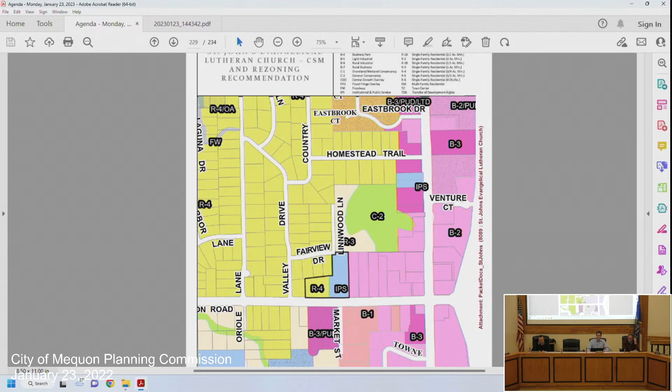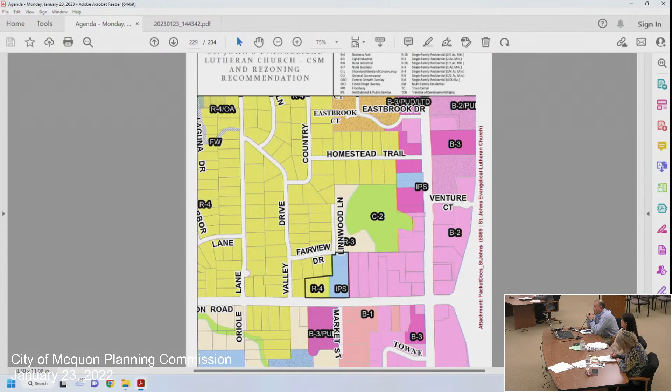What's the catch? Well, they have to agree to it because they're limiting their rights. We have these—in fact, we have a similar circumstance right now with the old Bruce City Barbecue that has a PUD that dictates it can only be a restaurant. So it's B2, and people come in and say, 'Oh, I'd like to do this,' and nope, you can't do that without a rezoning change. So it does restrict the use of the site, but if both parties are willing to accept that, then that's a compromise that works.

So everyone can understand, I brought up the B1 district, and under permitted uses, I think it's the part in parentheses 1 that's maybe at most issue. So under 1, it's retail trade establishments which supply convenience and specialty goods and services, including but not limited to groceries, meats, dairy products, baked goods or other convenience goods, drugs, dry goods, and notions. And then 2, 3, and 4, I think, are maybe much less of an issue, perhaps.

Personal and professional establishments which perform services on premises, including but not limited to repair shops, watches, radio, television, etc., tailor shops, beauty parlors, barber shops, photographic studios, dry cleaners, laundries. 3 is general offices, and 4 is finance, insurance, and real estate services, including but not limited to banks, insurance offices, savings and loan associations, and security brokers. So those are the permitted uses in the district.

So if we're rezoning it to that with no conditions, you're likely to someday have something in 1 or 4. The other ones are maybe a little less likely.

So B3 is what Mickelson wanted. Well, B3 is just general office. Yeah, B3 is general office. I guess you could go down that path as well, but I have to check one thing on that.

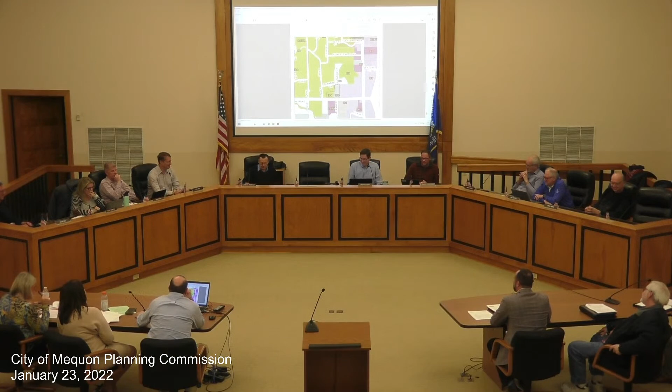And I did look up the B3. I certainly appreciate the perspective on where you're coming from, but we're making a decision with rezoning that will be here when we're all long gone. So I hope we can respect that as well.

I'm gonna live forever. Good luck with that.

I did look up the B3. It does have the same lot size requirement of 1.5, but it does still also allow sit-down restaurants as well. So the difference between the two is basically the retail portion. The B3 does not allow a retail component. It has all the other uses, but it also has the sit-down restaurant issue.

I didn't see a restaurant in B1. Is there a restaurant in B1? I believe there is, yes. Not with a drive-through, yes.

I think it's conditional. Just read the totality of it. Maybe just the overview.

Any other comments from the commission, or is there a motion? I like the particular use we're going for here, but I want to make sure we don't have concern about what else could be built 20, 30, 40 years from now. I just don't want to leave a mess for another council or planning commission to clean up.

I'm not saying it would be a mess. I fully understand that. I guess it's also.

Can't you make this just conditional so it's protected? That's what the PUD would be for. Yeah, PUD. The PUD would restrict the uses there totally if you go that route. So they wouldn't have the ability to seek anything other than whatever uses you want to see there. If you just go B1, you do have the ability to regulate conditional uses in there.

But again, it's not like it used to be, the state laws changed over the years. You can't just say no to a restaurant because two neighbors don't want it. You can put conditions on it, but you just can't say no. So it depends how concerned you are over the long-term use of that site and how you want to go about it.

Can we do the PUD with B1 and just have a condition where there would be no allowance for a restaurant? Sure. With the PUD you can stipulate, it's an agreement between parties. So you can, as long as they agree to it, stipulate uses with regard to what you're going to allow or not allow there.

So depending on what you're looking for, you could say it has to be office of some sort, or if you're okay with a retail component, you could say office and retail, or if you don't want either one, you could just say general office only, or financial, insurance and real estate.

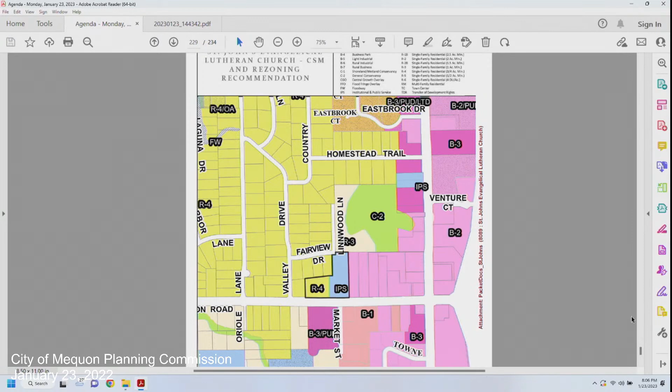I don't want to limit it to financial, insurance, and real estate. I'd want some flexibility, but I don't want to see a restaurant. My goal is to not see one. It's right next to residential, that buffer property.

If we would approve this for a restaurant, I don't know that the neighbors would be as pleased as they would be with the property as it sits right now. I want to allow flexibility on the property because of its proximity to the other business, but I don't think it's an appropriate site for a restaurant due to the fact that it's right next to residential, and also the egress, the in and out on Mequon Road. I think it would be a challenging site.

Then if you're not as concerned with the retail component, I would do the IPS with the B1 PUD overlay that basically prohibits any restaurant on the premises. Would you be comfortable with that, Mr. Wolfel? Potentially. You said an agreement between parties, like, is there still a clear severance between things?

Well, the institutional use will be part of the PUD only because of the acreage necessary, but their use itself would not be regulated by anything other than the IPS zoning district.

But we have to include them. I guess what I mean is, is there a continued tie to the entity of the church? The only tie is this PUD overlay. It's no different from what we did with Landmark Credit Union and the RBs—those are all part of a PUD, but they're all separate and distinct entities.

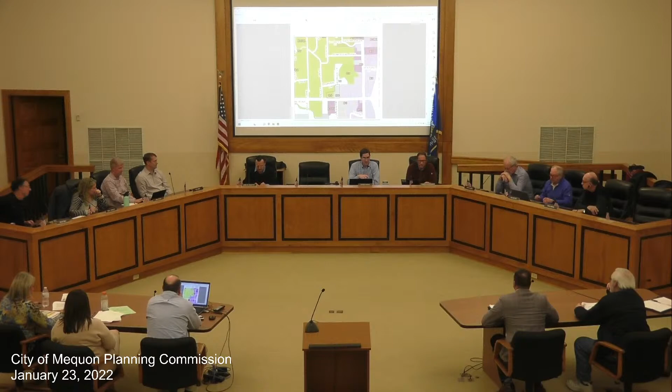So you have a motion and a second. Any further comments or questions regarding that motion? If not, all those in favor please say aye. Aye. Any opposed? That motion passes, and you can take some time to digest it—there's plenty of time to catch up with it because of the glacial pace government moves at.

Appreciate it. Thank you. Thank you.